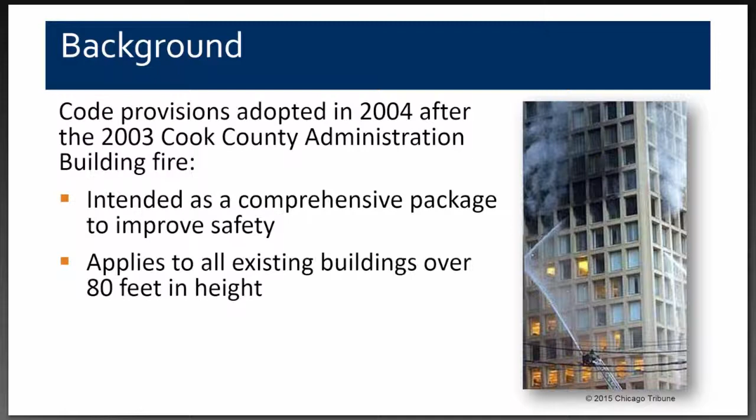First, some background. The major components of the high-rise ordinance are life safety data sheets, which are required to be submitted to the city so the city has a brief summary of the building's fire safety features; one-way and two-way voice communication systems, which I'll talk more about shortly; automatic sprinkler systems for commercial buildings; changes to about 10 sections of the Chicago Building Code to allow for more economical installations of fire protection features; and the life safety option for residential and landmark buildings so as not to have automatic sprinklers mandated for them.

Smoke-proof tower equipment must now be tested annually. In fact, that system failed to operate effectively in the county building fire, and it was determined that it had not been tested in many years. And the code was clarified to require minimum 1-hour rated fire doors for stairway shafts.

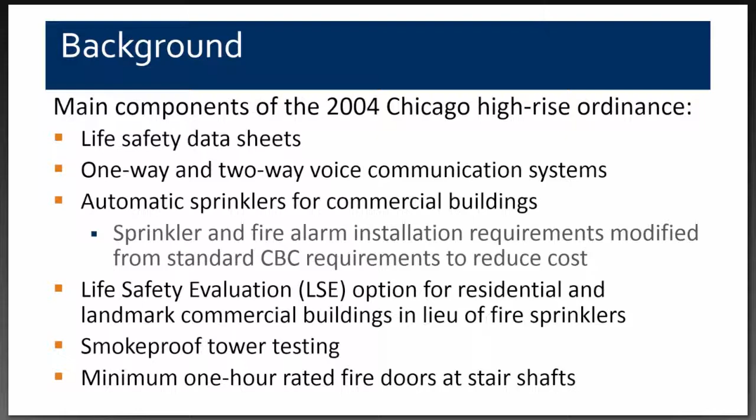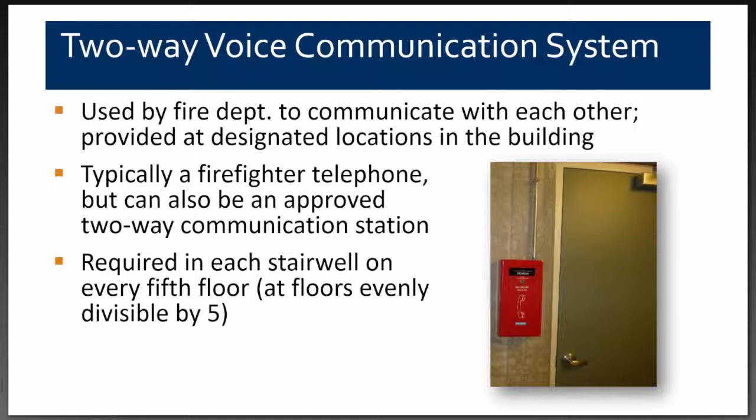Also required by the ordinance is a two-way voice communication system. This system is intended to allow firefighters and incident commanders to communicate with one another. It's not intended for use by the public. These devices are typically telephones located within cabinets every 5th floor in the stairways, at the fire command panel, and sometimes in other locations. I should mention that the ordinance allows the elimination or substitution of existing devices for one-way and two-way voice systems in very limited circumstances.

Another major element of the ordinance is that doors serving stairwell enclosures must have a minimum rating of 1 hour. This is an important safety measure to restrict fire spread vertically and to provide a safe environment for people leaving the building by the stairways. In new construction, doors have to have a higher rating, and this was intended to provide a reasonable minimum level of protection.

To be effective, the doors must meet minimum standards, which is reflected by having a door certified by a testing agency, such as Underwriters Laboratories. You can usually find the label of the testing agency affixed to the hinge side of the door. It's also important that the door have a self-closing device and that it tightly latches into the door frame to keep fire and smoke out of the stairway.

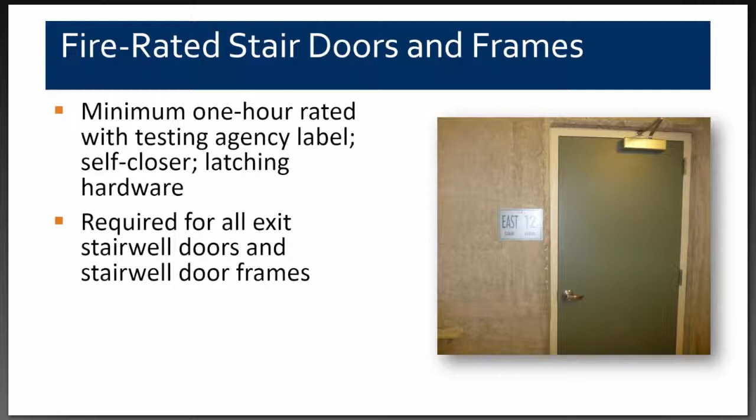More about the life safety evaluation. It was 1975 when the Chicago Building Code was changed to require all new high-rise buildings to have fire safety features, which we now associate with modern fire protection. Things like rated construction, sprinklers, communication systems, enclosed means of egress, compartmentation, to name a few. The challenge was, what should be done to improve the fire safety in buildings built prior to 1975?

Well, between 1975 and 2003, when the Cook County building fire occurred, the city did experience several loss of life fires in the older high-rise buildings. Each time, there was talk of sweeping code changes, including features like sprinklers, but cost consideration and practical difficulties overcame the calls for improved fire safety, and eventually interest declined.

As I mentioned earlier, following this fire in Cook County building, city officials decided it was time to take a step forward in implementing minimum requirements for existing high-rise buildings, those built prior to 1975. This time a new approach was taken. The various obstacles to previous actions were considered. New and more cost-effective technology was considered. Certain changes to the code were made to make the improvements more affordable. More reasonable timeframes were developed.

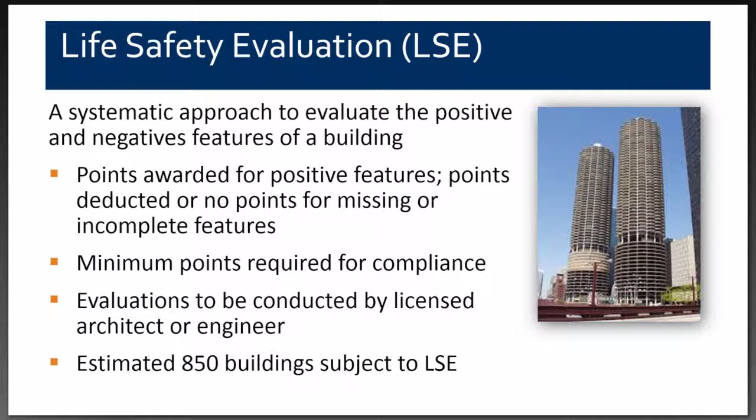With such a system, there are many benefits. Remember, this is the method used to demonstrate that a building has a minimum level of safety so that a sprinkler system is not required throughout the building, saving the owners perhaps millions of dollars while still providing a reasonable level of safety. It's an objective system and it's flexible. There are separate system score sheets for residential and commercial buildings because the code requirements for each of them are different. But of course, there are some caveats with this system.

We advise our clients that even if they meet the minimum score of the life safety evaluation, it's not meant to suggest it's the same level of safety as that from a sprinkler system. Loss of life, injuries, and property damage will not be prevented. Also, we advise our clients that a passing score is not intended to circumvent the minimum code requirements for existing buildings in Chapter 34, and I'll talk more about that a little bit later.

Here's how the process has worked. A licensed architect or engineer prepares the report on behalf of the owner. The report with a passing score or with required upgrades to achieve a passing score is sent to the Department of Buildings. The reports are reviewed and either approved or rejected. If approved, the building can implement the necessary upgrades. If rejected, the report needs to be revised and resubmitted to the Department of Buildings until the report is eventually approved. The Department of Buildings will inspect buildings when upgrades are completed, or as we know now, after January 1, 2015, to confirm compliance with the ordinance.

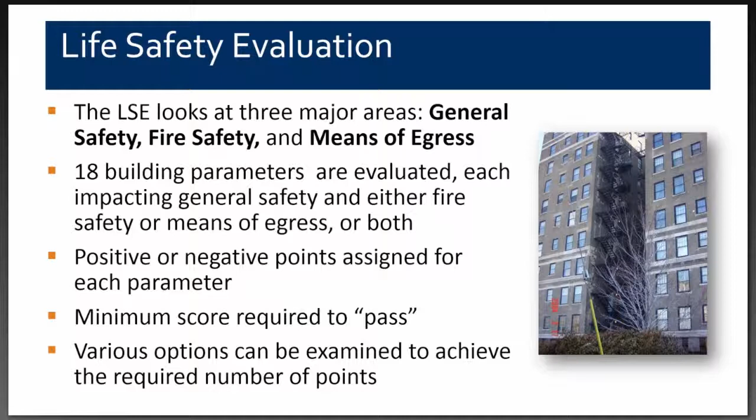Corridor walls are reviewed to determine if people can safely use the corridor during a fire in a unit. As mentioned earlier, the stairway and elevator shafts are reviewed to verify if a fire would likely be contained to a single floor. And what we call mixed occupancies, such as retail spaces and parking garage areas, are verified that they're properly separated so they don't threaten the residential parts of the building.

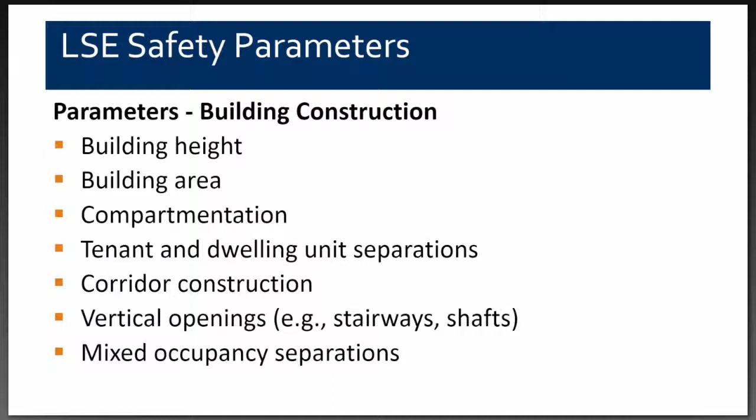The building is also reviewed to determine the locations of smoke detectors, whether and to what extent fire alarm and communication systems are provided, or automatic sprinklers may be provided. Also, the heating, air conditioning, and ventilation system is reviewed to determine it will not spread fire.

We'll also look and see if the building has any special smoke control features, and how auxiliary uses, those parts of the building that are related but not specifically the same as the main use of the building, how those auxiliary uses are protected, similar to the way we do for mixed use.

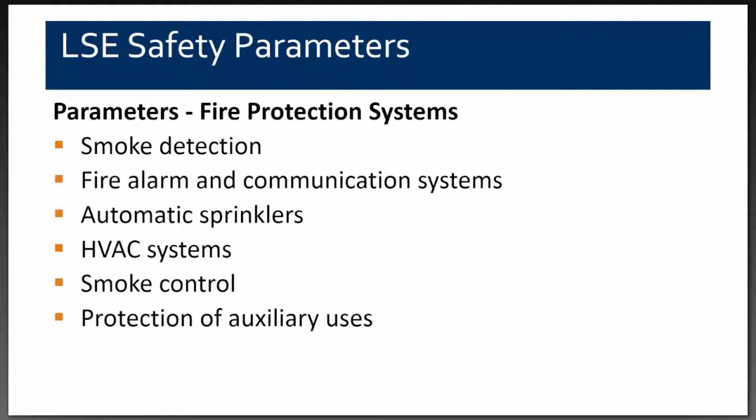Next, the building's exits are reviewed to verify there is a proper number of exits, that they're of appropriate size and capacity, that they're located within the prescribed travel distance, that elevators are arranged to be recalled and used by the fire department, and that emergency lighting is provided to assure people can safely exit in the event of a power failure.

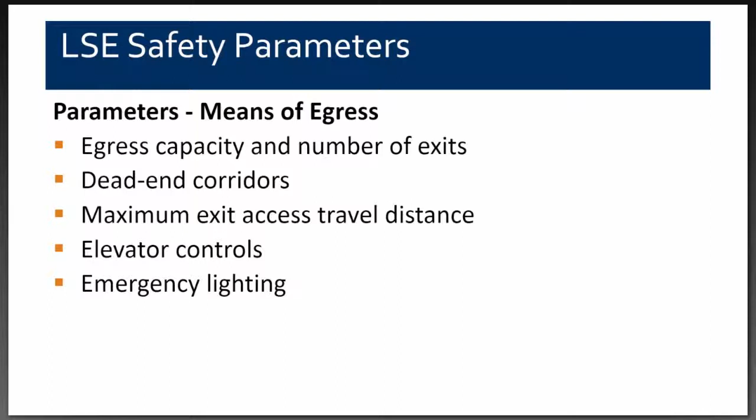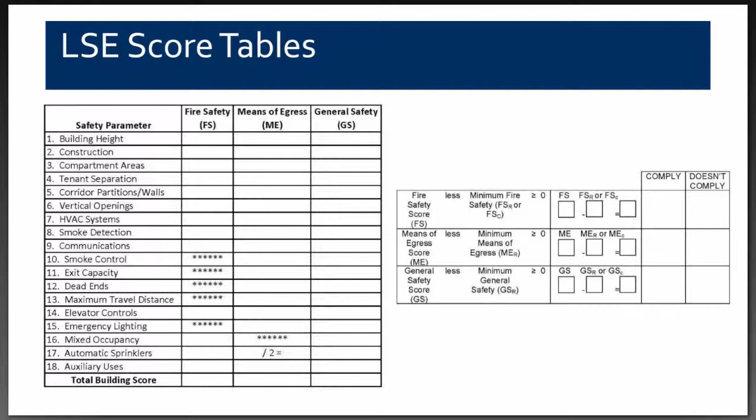After all the points are determined, they are included on a score sheet like this and evaluated to determine if they meet the minimum score in each of the three categories. This is an example of a completed score sheet. This building has failed, as you can see by looking at the total

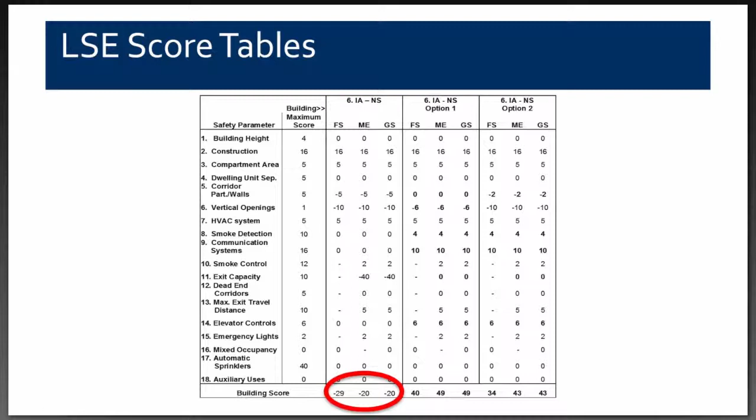in the left-hand column. You'll also see two columns to the right, which are trial options to determine what are the potential things that can be changed to achieve the number of points. And again, the flexibility of this system is apparent here because one can look at what is feasible, how much things cost, and then determine the course of action.

As I mentioned, we have developed a summary of findings from more than 220 building life safety evaluation surveys, and I thought it would be of interest to share with you some of the findings. Fewer than 10% of the buildings initially received a passing score. 5 landmark commercial buildings could not pass and were required to be sprinklered. It was interesting to note that 4 of those 5 were built before 1926, and 1 was built in 1965.

Not surprisingly, a vast majority of the buildings, 85%, did not have voice systems. This is also an interesting slice of data showing when the 220 buildings were constructed. A large group in the period between 1920 and 29, and a second wave between 1960 and 69. No high-rise buildings were built between 1940 and 49 in the survey, attributed, of course, to World War II.

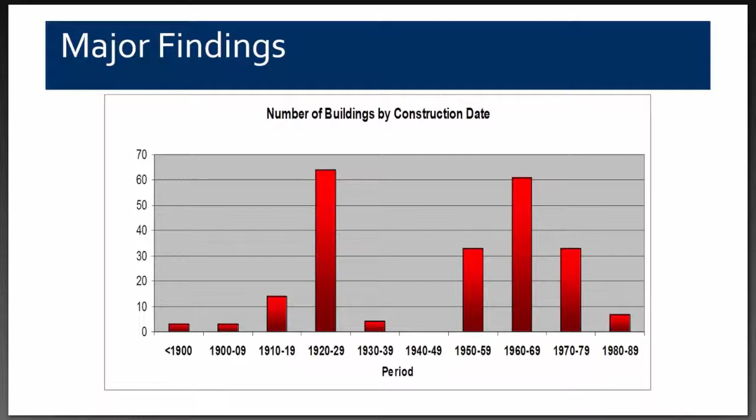It's also interesting to see that there is a correlation between building age and failing score, with the newer buildings having a greater chance of passing without any corrective measures being taken.

We're also able to calculate the average score for the three major categories for each building type. These are the median initial scores for residential buildings in the sample we analyzed. It's not surprising that the average scores are low with respect to the required scores, because fewer than 1 in 10 of the buildings received that initial passing score.

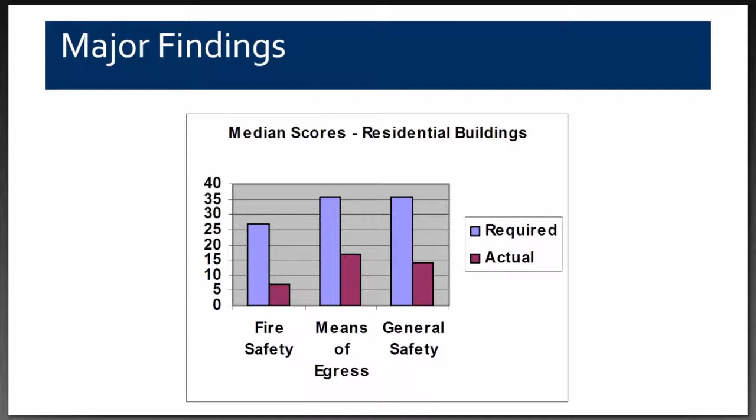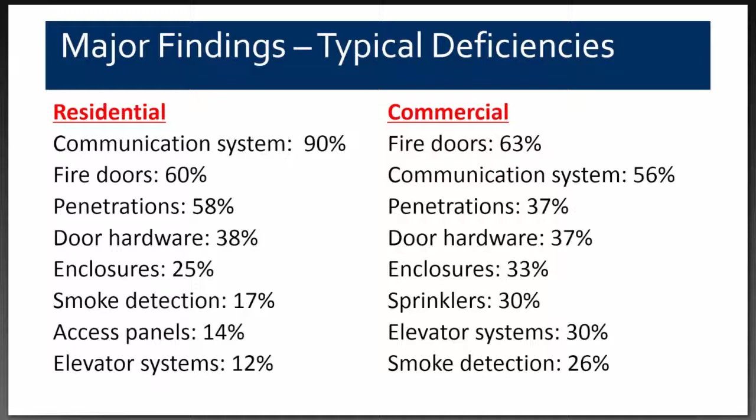Again, I think this is very interesting information about the estimated costs to comply with the ordinance for both residential and commercial buildings and for each type of deficiency. We found that the average cost of compliance for a building was about $207,000, with commercial buildings being about 2 times the cost of a residential building.

We also found that the cost of compliance in residential buildings worked out to be about $1,800 per unit. And you can see on the right, when there are deficiencies, the approximate cost of what it takes to remedy those deficiencies in residential and commercial occupancies.

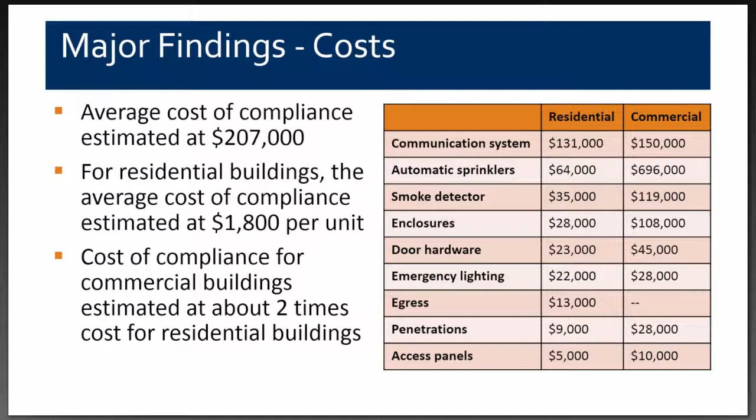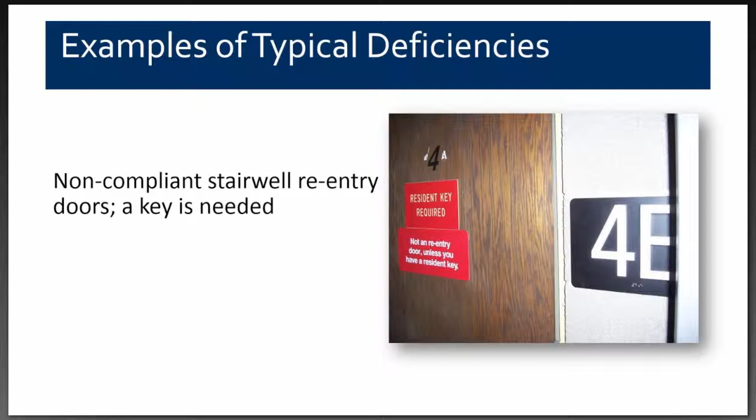Some of the more typical deficiencies are noted here. This is a serious violation, locking of stairway doors from the stairway side, intended to provide some degree of security and requiring a key for people to get out of the stairway. This was one of the deficiencies which caused the fatalities at the Cook County building. People could not get out of the smoke-filled stairway and out onto another floor.

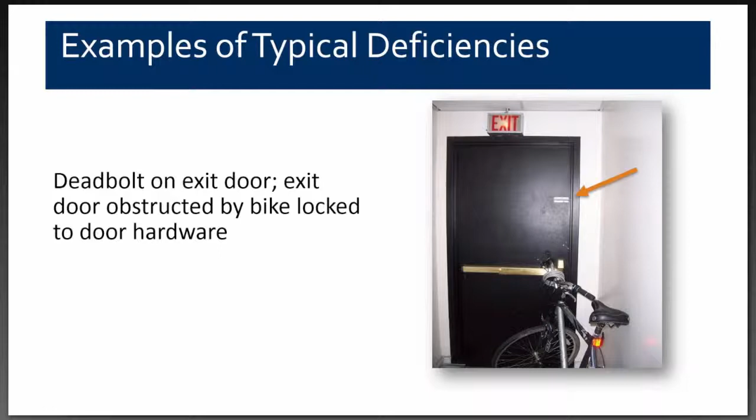This exit door has a deadbolt on it, as you can see where the arrow is pointing, and it also has a bicycle locked to the door hardware, which would make it extremely difficult to open the door and use as an exit.

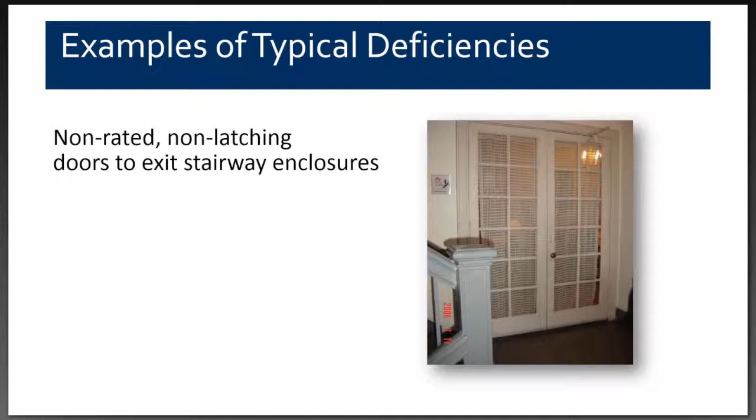We found the next situation to be a situation that was not all that unusual. Non-rated, non-latching doors enclosing the stairway, offering no protection to people using the stairway as an exit and who may need to pass by this fire floor on their way out of the building.

Here are 2 examples of discontinuous stairway enclosures. People need to leave the stairway and be exposed to smoke and flames on the fire floor on their way out. Moreover, the open stairways are ready avenues for vertical spread of fire to the upper floors, trapping people above the fire floor. Frankly, these are the kinds of buildings that the life safety evaluation was intending to find and fix, so as to greatly reduce the exposure to the public from dangerous buildings, which up to now had not been identified so vividly.

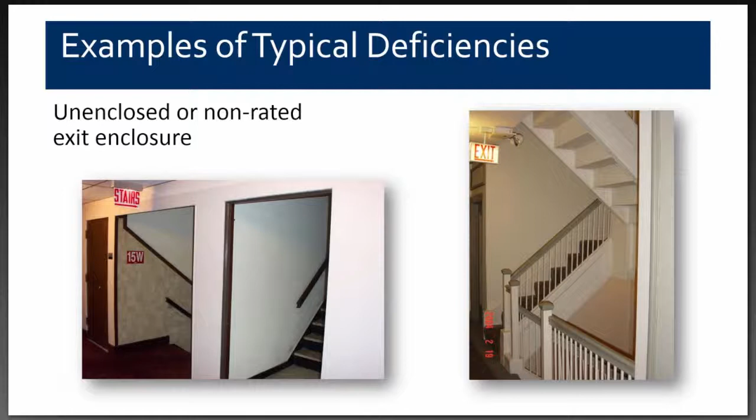The arrow in this photograph is pointing to an opening around the pipe which serves a scissor stairway, sometimes known as an interlocking stairway: 2 stairways in the same shaft. This is important because if one stairway fills with smoke, the other stairway could also be contaminated, voiding the only 2 exits for people on the upper floors of a building. Penetrations in such stairways must be airtight.

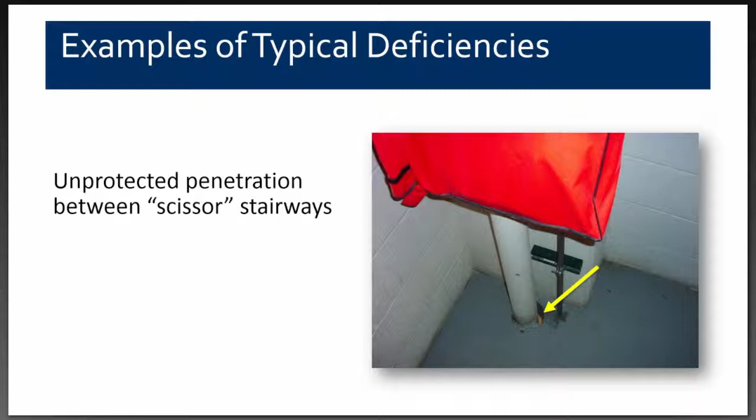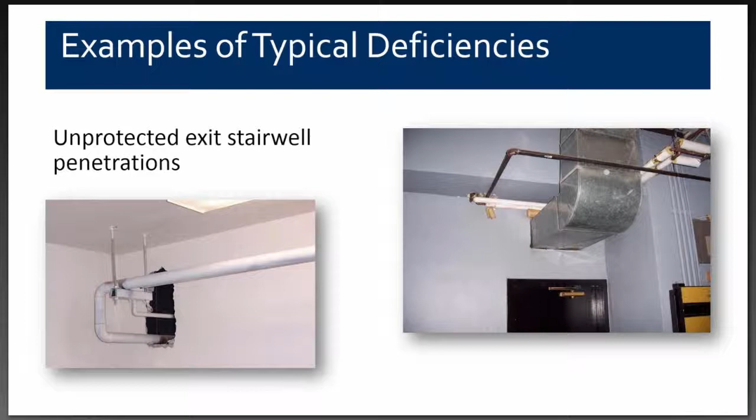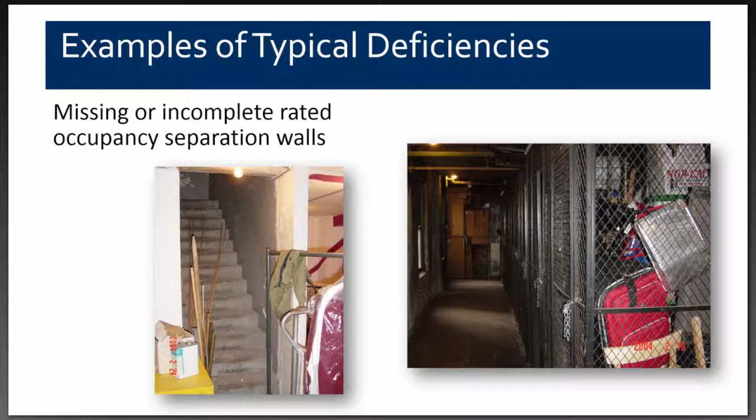This is an example of another very dangerous situation. The stairway on the left was found open into the building storage area shown in the picture on the right. This exposes the stairway enclosure to a serious fire and renders it useless to the occupants above. It also serves as an avenue for vertical fire spread throughout the building.

Here are 2 cases of corridor separations which have been compromised. The photo on the left shows a transom opening onto an exit access corridor. The door in the photo on the right is a rated door. You might even be able to see that label on the hinge side of the door, but it could be left open because it lacks a self-closing device. If somebody left the unit in a hurry during a fire, it could cause the corridor and the people using it to be subject to the flame and smoke coming from that unit.

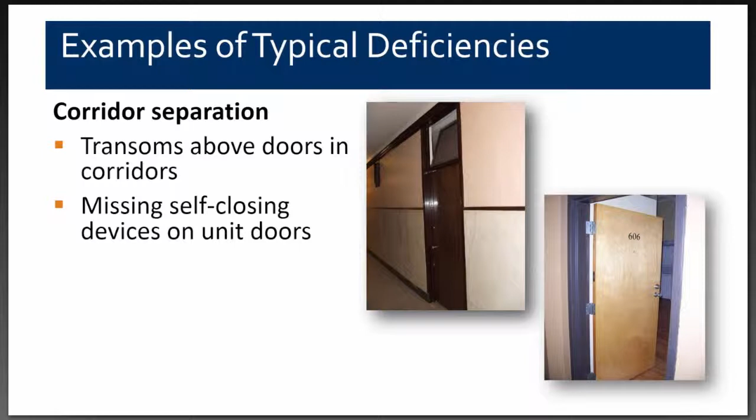So what's next? First, the Commissioner of Buildings has clearly stated that there will not be any further extensions of compliance dates. In fact, we know, and some of you may know all too well, that the city has begun enforcement through inspections. Over the last 3 months, we received a number of calls from clients about their buildings being cited for deficiencies, and they've received citations for court appearances. In discussion with city officials, I have learned that the city no longer wishes to negotiate with owners on an informal basis. They believe the best and most consistent way to enforce the ordinance is to take violators to court.

The city has a number of designated people with this program. One such person is David Naiman. If anybody would like that contact information, you can shoot me a note and I will send you their contact information. And I've been told also that the goal of the program is compliance, not the fines, which could range between $300 and $500 per day. It's common sense that if you show indifference to the ordinance in court, you'd likely draw some fines. That hasn't happened yet, but it's probably more likely to be in the future.

We've also learned that the inspections are not just limited to the items in the life safety evaluation. We've been contacted by at least 3 clients who have been cited for having wood roof decks on the roofs of their buildings. In each case, the deck has been installed for many years. The decks were not cited in the life safety evaluation report as violations for various reasons. But it is correct that having a wood roof deck is a violation of the Chicago Building Code.

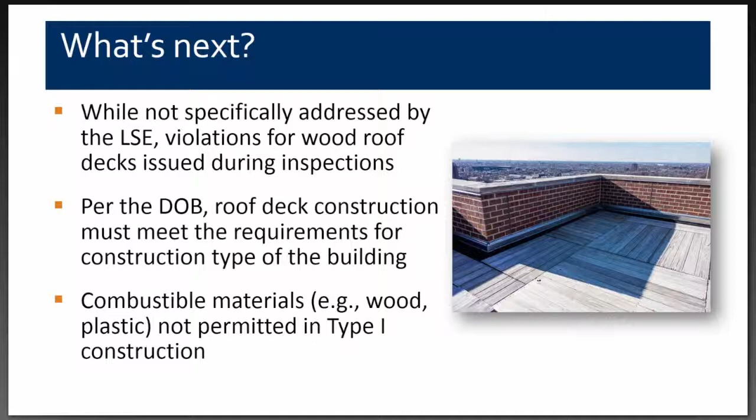We've developed a few scenarios to address the situation you may be in at the moment. Here's one, and interestingly, I actually received a call yesterday from a property manager who has been cited for not having a completed life safety evaluation. I won't get into the details here, but the client has been cited to appear in court next week.

So we've advised the client, number one, of course, the deadline has long passed. They should arrange to have a survey completed by a licensed architect or engineer as soon as possible. They should develop an accelerated time frame for repairs, and they should open communications with the Chicago Department of Buildings on their plan.

Another situation you may be in. A number of building owners and managers find themselves in this position. My report was accepted and my upgrades are completed. Well, great. You should prepare for an inspection by the Department of Buildings.

But remember, the Department of Buildings inspection is not limited only to life safety evaluation issues, as we've recently found out. We recommend and remind you that your facility should be in good condition for a general inspection. Make sure your exits are not locked or blocked. Some of the fundamentals, that your systems are maintained.

This is another condition which the Chicago Tribune recently reported applies to hundreds of buildings. My report was accepted, but my upgrades aren't finished. Well, our advice, continue to complete the upgrades as soon as you can. If taken to court, you should be prepared for a court appearance. Prior to court, you'll likely receive another inspection so the city can provide the court with updated information.